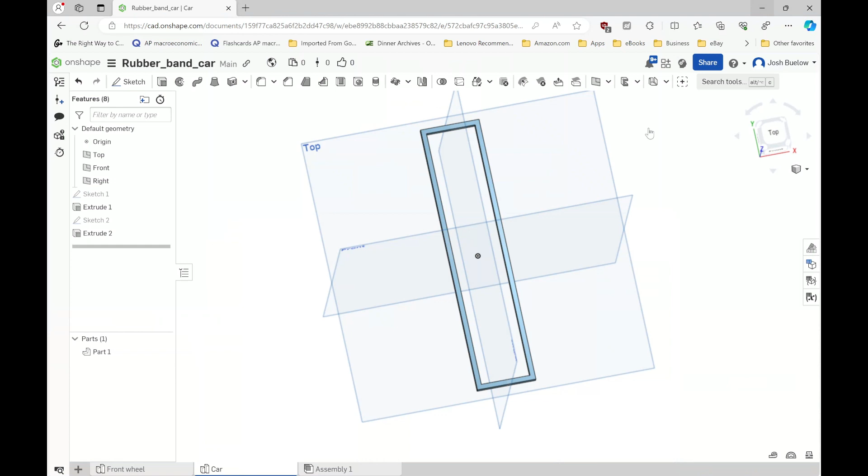Hello everyone. Today we're going to be learning how to design 3D printed rubber band car wheels, and even the whole rubber band car, so that you can change how the car is shaped for different challenges. So let's get started.

We'll click the blue create button, make a new document. I'm going to name this document rubber band car.

Let's start with the wheels, because if that's all you want to make, that's okay, so I can get you rubber band cars for our competition. Click the top plane, click sketch, and type N so we can look right at it.

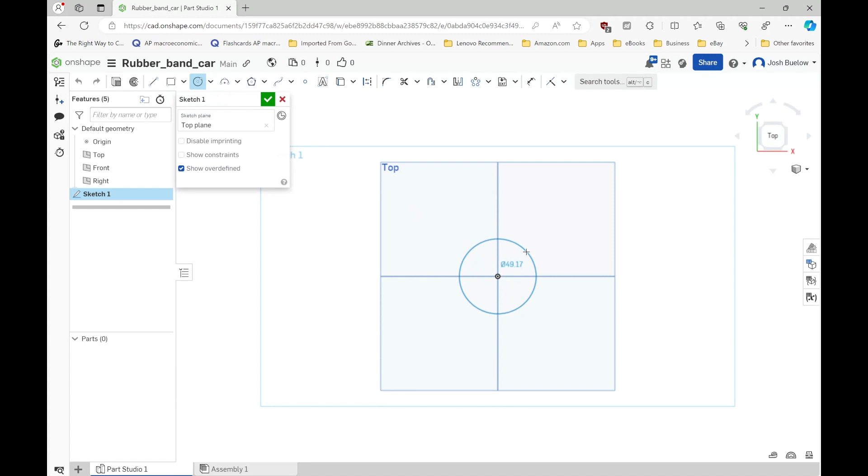If we want to make a wheel, all we really need are two circles. The first one goes in the middle and this is going to go on a kebab stick, so it should be 3.35 millimeters in diameter, that's what our kebab stick is going to poke through. Then I'm going to make another one also right from the center, and if this is a front wheel, maybe I'll want it 40 millimeters, something like that. Then that's about it.

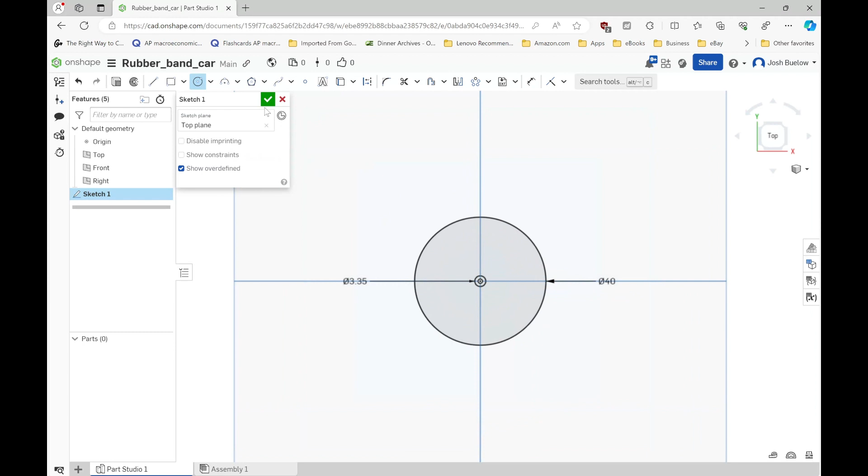Click the green check mark, click extrude, click the surface you want to extrude. If you orbit to the side, you can see this is more than we want, so let's make that just 3 millimeters for a front wheel, something like that. There we go, we have a rubber band car front wheel that will work.

But you can make wheels better or worse. This is a pretty basic wheel, but say we were running on carpet, maybe we want some better way for these wheels to grip so they don't slide at all. Let's see how we might do that.

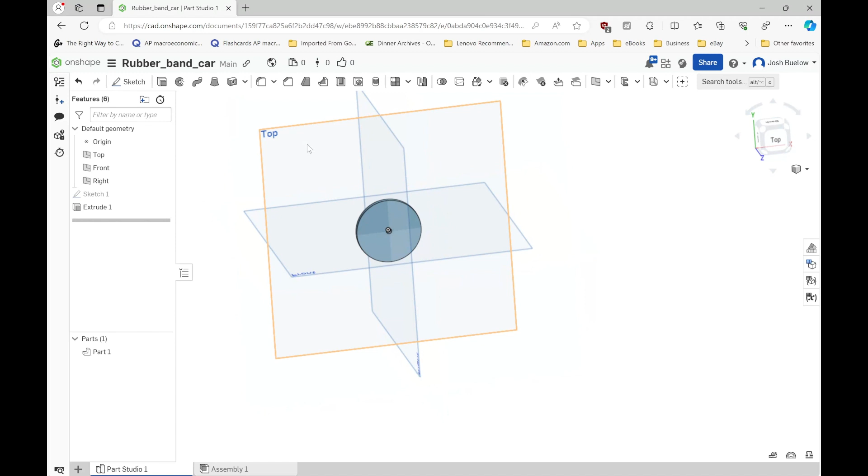If I click on the top plane again, and I make another sketch, and type N to look right at it, maybe I want to do something kind of like this.

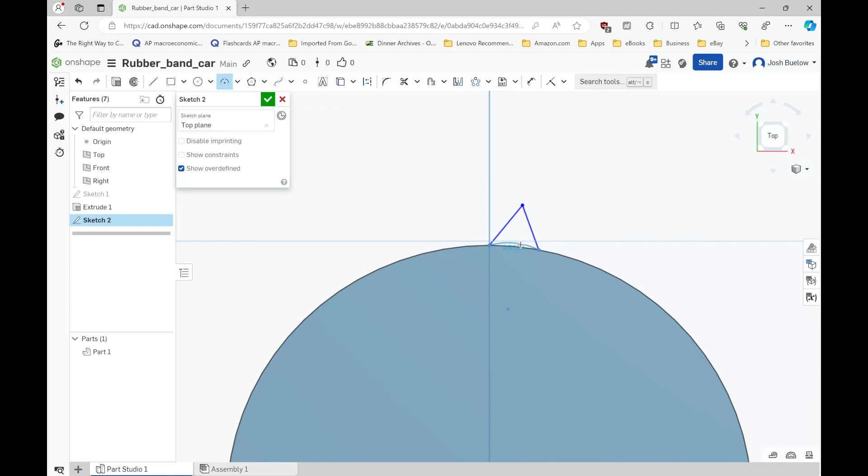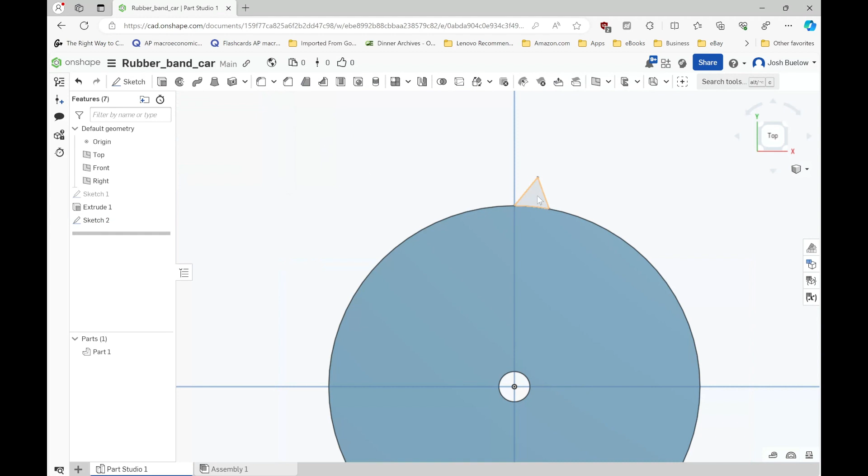Escape, and then let's make a 3-point arc that follows. It's not going to snap to it, is it? Well, I can do this, so that it follows our circle here. If I go coincident, I can click this point right here and that point, and that'll make it exactly what I'm after.

So I click the green check mark, click what I want to extrude, click extrude, and I'm going to extrude this the same distance that I did for the wheel, so let's go 3 millimeters. Then I'm going to pattern this around my wheel so I have spikes on my wheel that'll dig into the carpet.

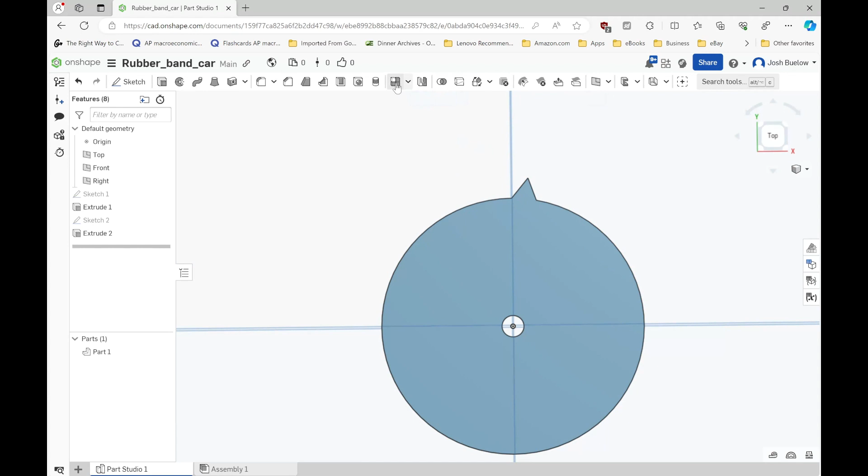Let's see, I want to do a circular pattern, and I don't want to do a part pattern, I want to do a feature pattern because I want to pattern that same extrude I just did. So I'm going to click extrude. My axis of pattern, I can just click around the surface like that, and then I'm going to click reapply features, and that'll work. You can change how many you want here.

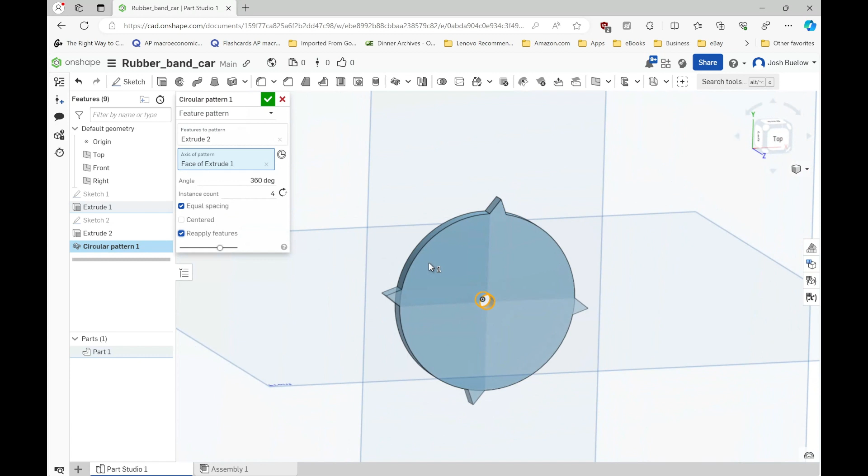Maybe I want 20, let's see what that looks like. Actually, looks pretty good. Let's see what 10 would look like. Yeah, something like that. So whatever you think, you can make these spikes bigger, smaller, make them blocks, whatever shape you think is going to dig into carpet best, maybe something that's kind of curved and comes back. Anyway, that's one way you can make wheels better.

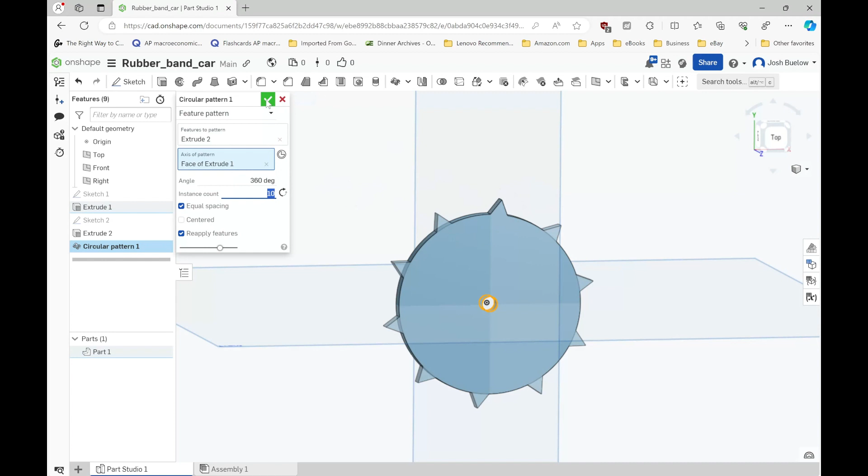You can make wheels better by making them bigger or smaller. A wheel that you want to go as fast as possible, you might want a little bit smaller because it'll take less to accelerate, and you won't have as big of a moment arm that the rubber band has to work against. But if you want it to go really far, maybe you want a bigger wheel, because a bigger wheel will get a lot more distance out per revolution of the rubber band.

And then the last thing is weight. The lighter you can make your wheels, probably the further you're going to go, because your car doesn't have to move as much weight to go from one place to another.

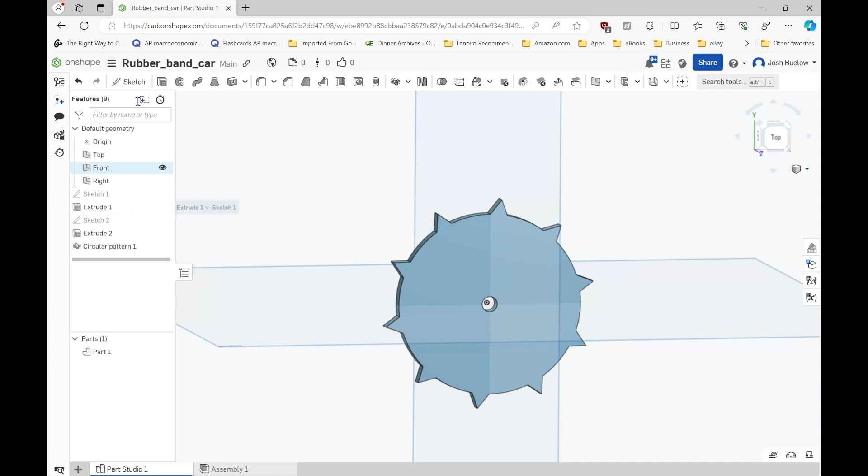So once again, if I click the surface I want to sketch on, make a sketch, type N to look right at it, you can add cutouts. These cutouts can be literally anything you want. Maybe you want circles that are cut out of your wheel. You can pattern these as well so it's nice and even.

If I press Control Z, I can get rid of them. Maybe you want squares that are cut out of your wheel instead.

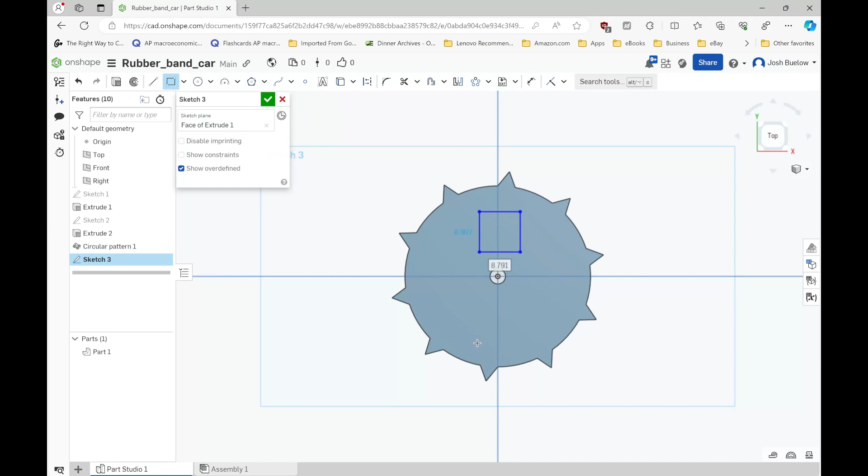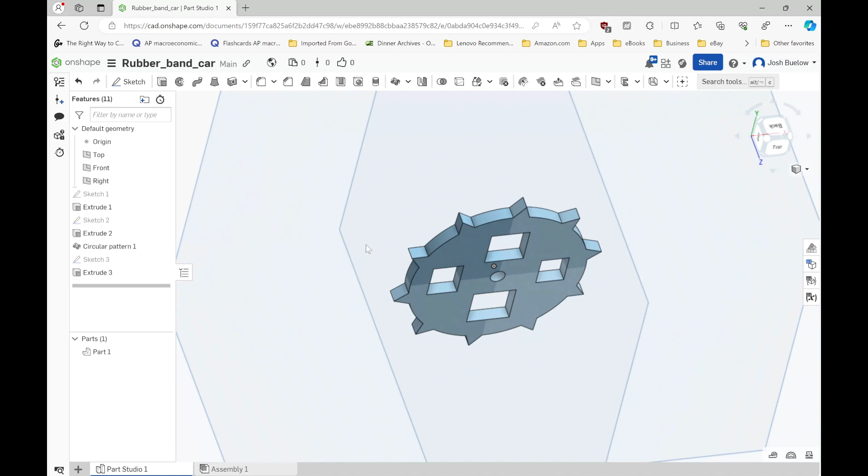Pretty much anything you want, but a lighter wheel will usually be a faster wheel. So again, I would just click extrude, remove, green check mark, and there we go. My wheel is a little bit lighter now, which means it can probably get up to speed a little bit faster.

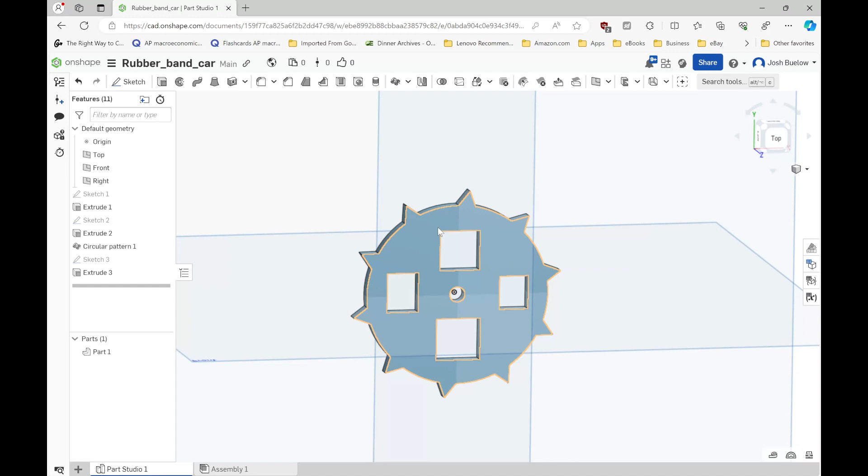So that's about all you really need to know to make a rubber band car wheel. Just get that 3.35 millimeter inner diameter, and then whatever outer diameter you want, however you want to make it grip to the surface you're going to be racing on, whether that's carpet, tile, or hardwood floor. Because plastic obviously won't grip as well as rubber, so you need to figure out a way to make it grip whatever surface you're on. But yeah, that's about it for the wheel.

If you also want to make the car, you can adjust the dimensions your car is going to be. So I'm going to show you how I'm going to dimension, or design, the car that you guys can use if you don't want to make one. And if you want to use this same tutorial to make a different car that's bigger or smaller, you can do that too.

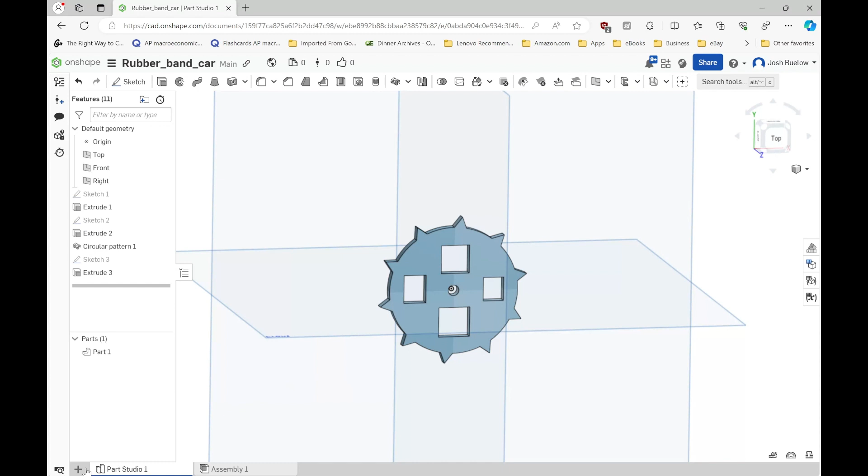I'm going to click this plus sign to insert a new part studio, create part studio. I'm going to right click and rename this car, because it's the actual part of the car. I'll rename this one wheel as well - I'll say front wheel, because you might want to make a different kind of shape for your rear wheel, since that's where we're actually going to have all the force from the rubber band going through.

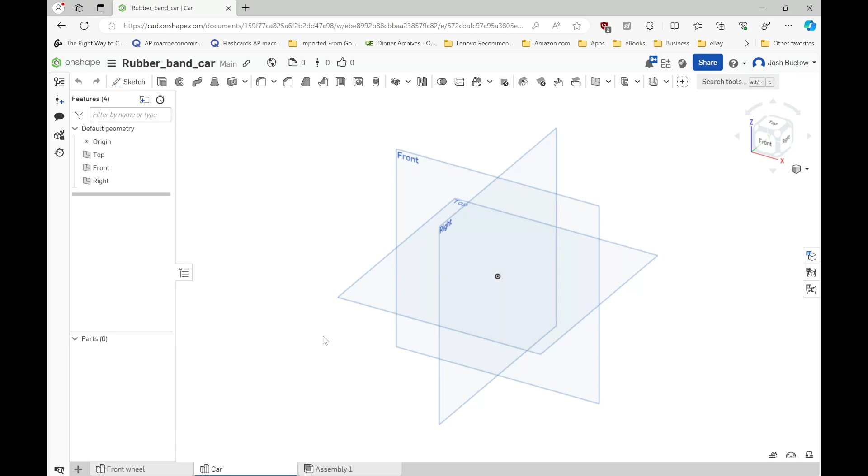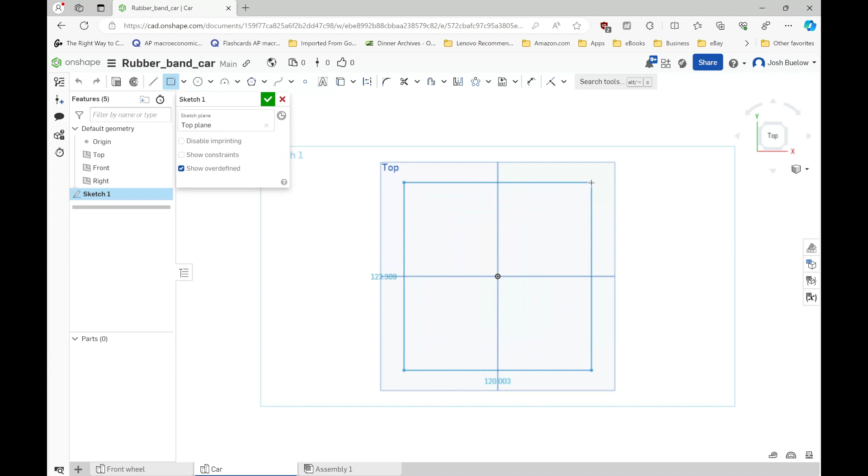So to make this car, I'm going to click my top plane, click sketch, and type N so I look right at it. I'm not going to use the regular rectangle - I'm going to use the arrow to the right of it and click center point rectangle. Click this middle point, make sure it has that orange box around it, and then click anywhere you want. I'm going to click here, and I want it to be just 30 millimeters wide and 140 millimeters long. So I'm going to click the green check mark.

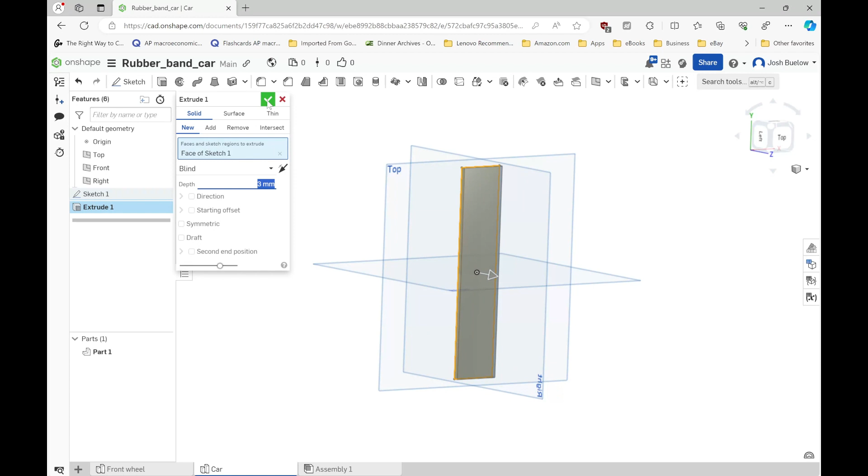I'm going to click that surface and extrude it. I don't want 25 millimeters, I only want 3 - this is going to be pretty skinny. But again, the lighter the car is, the faster the car is probably going to be. So there we go.

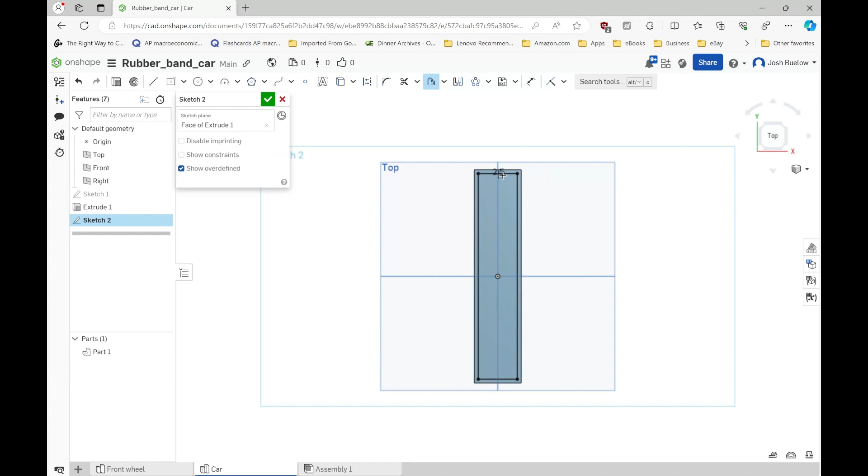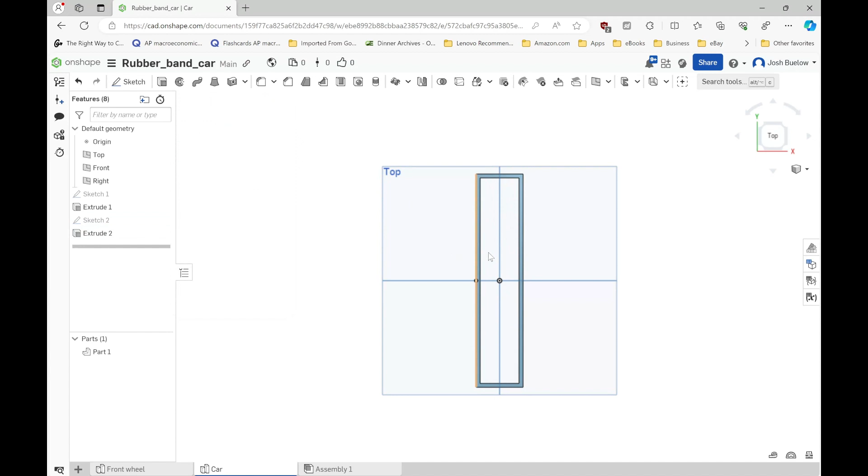Then I'm going to click that same surface, make another sketch, and cut the inside of it out. How I'm going to do this is use the offset tool, click all of the different edges, and then drag them to the inside. Now, I just know because I've designed this before - press enter - that you want this to be 2.5 millimeters, because that will still be strong enough to resist the tension of the rubber band, but it'll be nice and light. So I'm going to click the green check mark, and then extrude cut the inside of this out. Click extrude, remove, green check mark, and it'll cut that right out.

So next, I want to add my wheel hubs to this. I'm going to rotate to the side, click the surface I want to sketch on, click sketch, type N so I'm looking right at it, and use this 3-point arc tool. Click anywhere on this line, click, and drag this so that the dot you can see is directly on the top line - I know it's there when I get these orange squares, meaning it's directly on that line. So I'm going to click, and I want R10, meaning a radius of 10, so I have a diameter of 20 on this circle right here.

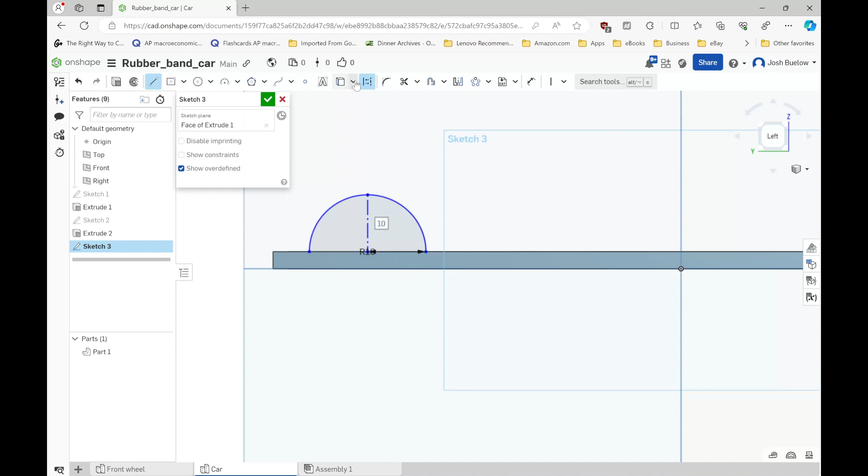Next, I need to add the hole for my wheel axle. So I'm going to make another circle. Actually what I should do first is make a construction line. Grab the very center of this, so you can see when I get this orange square, I'm at the very center. Grab the center, straight down. Click construction again, so you're not making a construction circle, to make sure my circle is definitely in the center. Click anywhere that isn't highlighted, that doesn't give you a highlighted orange square.

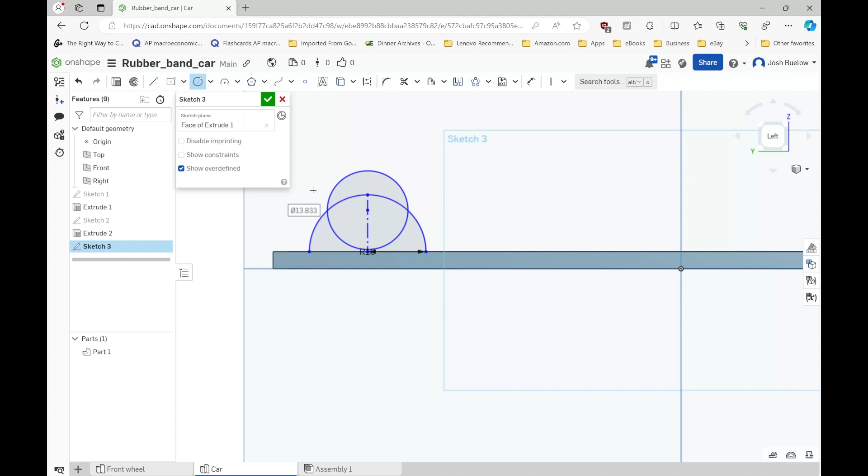So I'm going to go here, drag out, and I'm going to say we use a straw for the bushing here. So I know that this is exactly supposed to be 6.1, so I'll say 6.1. And then the height here needs to be 3.1 millimeters. There we go. And then I'm going to draw a line across the bottom to complete my sketch here.

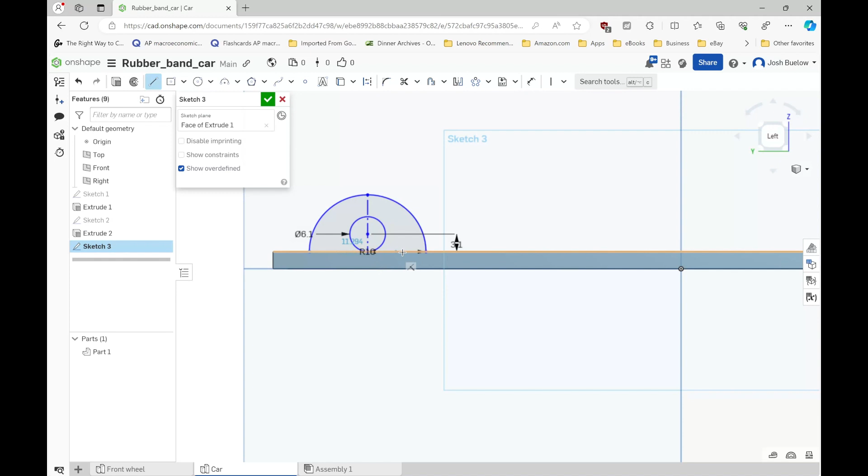And then I'm going to mirror this across the center line because we made our car symmetrical from front to rear, which makes this a lot easier. So I'm going to click mirror, select the line I want to mirror across, and then click all the parts that I want to mirror.

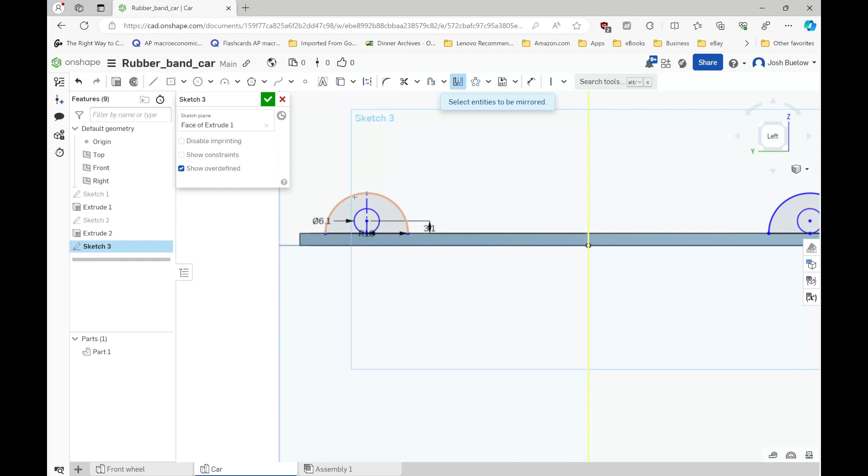Then the last thing I'm going to do is dimension where this is with respect to the front of the car. So I'm going to click here, click this side line, and type in 5 millimeters. That'll also make this 5 millimeters away from the back. So click the green check mark, and I'm going to extrude both of these 2.5 millimeters.

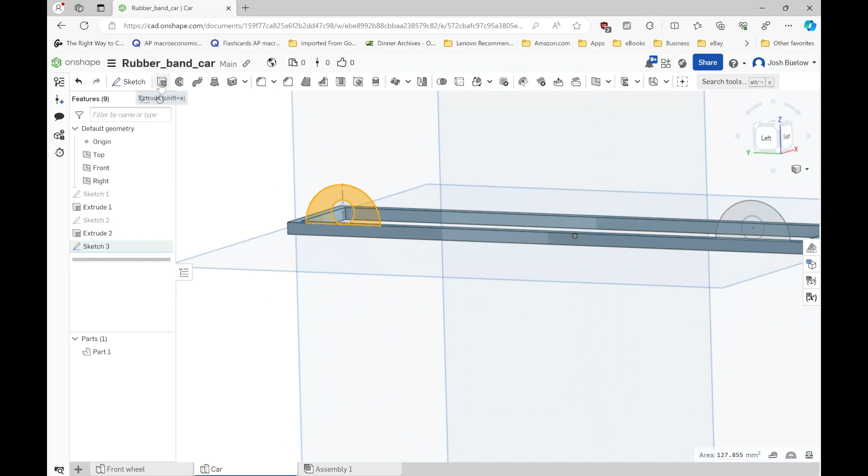So there and there. Oh, not the line. There we go. And extrude, I want the opposite direction, 2.5 millimeters. And see, there we go, perfect.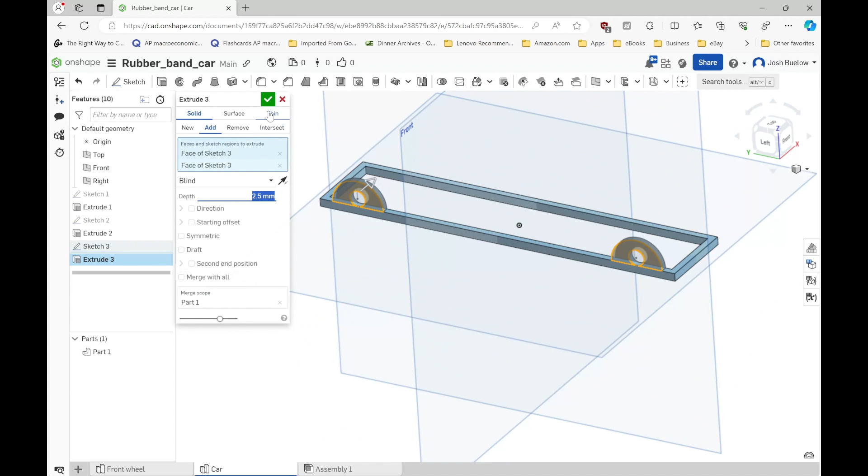Switch to add. It used to be saying new. We want to just add to our chassis instead of making a new part. Green check mark. And then I don't have to draw these all over again to make them. I can just mirror them across this right plane right here because you see it goes right down the middle, so I'm going to do that to save me some time.

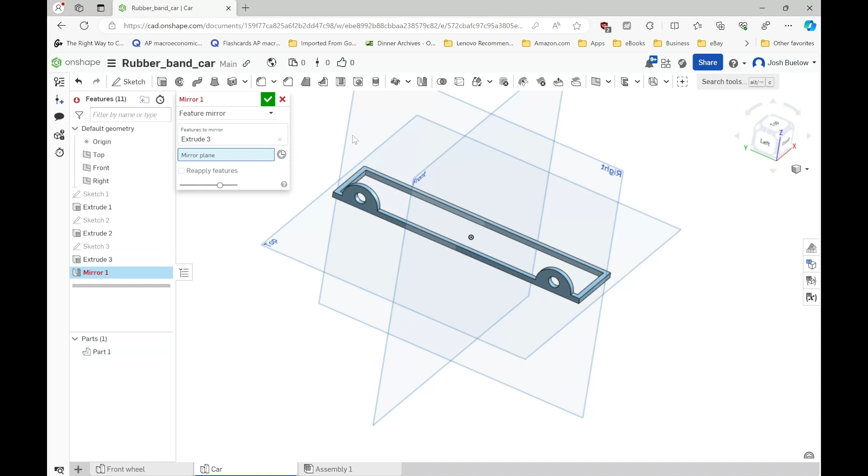So I'm going to use mirror right here. Entities to mirror, it's not going to be a part, it's going to be a feature, that extrusion that we made. So I'm going to click extrude 3 because that's what I want. My mirror plane is going to be the right plane, and I have to click reapply features, otherwise it's going to give me an error. Click the green check mark.

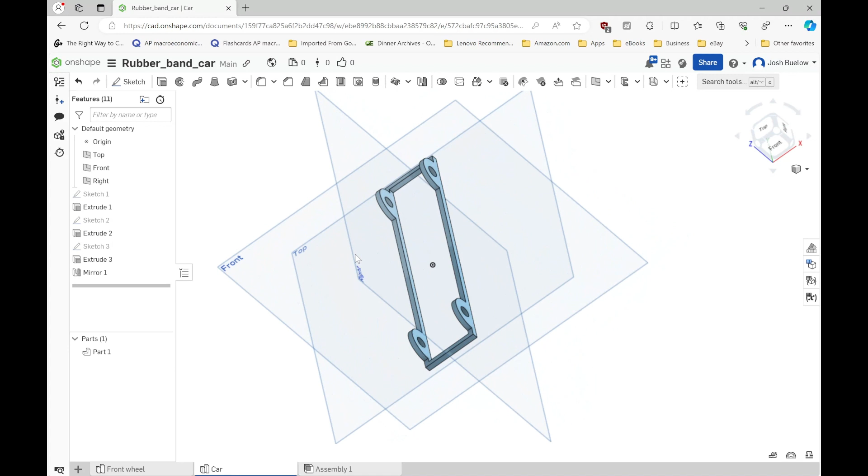All right, so the last thing we have to do is have somewhere on here that the rubber band can actually attach to when it's going to wrap around our axle in the rear of the car. So let's make that next. I'm going to click my top plane, type N, and click sketch, so I can make a new sketch.

And for this, for the base of this, I'm only going to need 2 rectangles. So I'm going to click corner rectangle and click one of these sides, make sure it's highlighted orange, make sure the other side is highlighted orange. That's just going to be 25 millimeters, so I'm going to change this one to 5 millimeters.

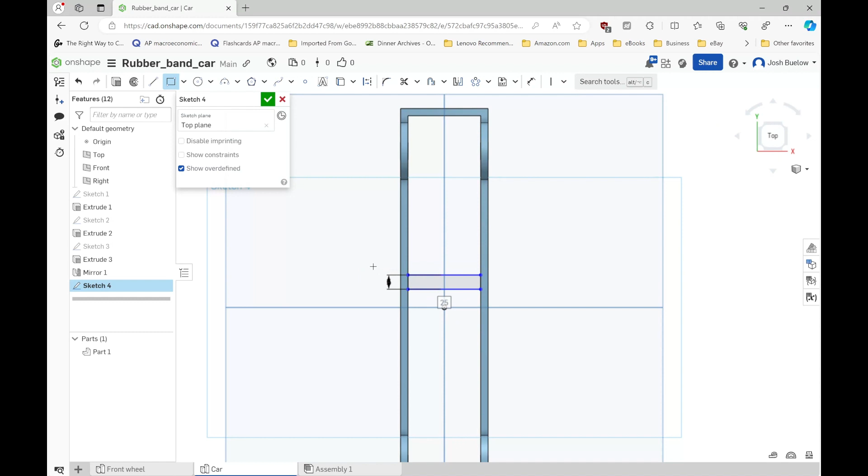And I'm going to dimension this so that the bottom here is, let's see what 20 looks like. 20, no, let's see what 10 looks like. 10 millimeters beyond midpoint of the car. I like that. Green check mark.

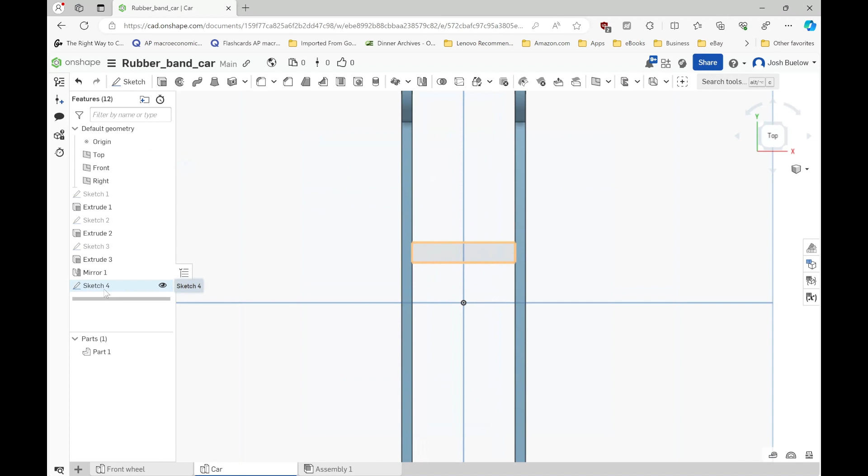Oh, sorry, go back into that sketch. We actually need to add one more rectangle, like I was saying. In order to do that, let's make a construction line. Get this orange square, go all the way across, and then I'm going to use this construction line to make sure that my next rectangle, which is going to be a center point rectangle, is exactly in the very center of everything.

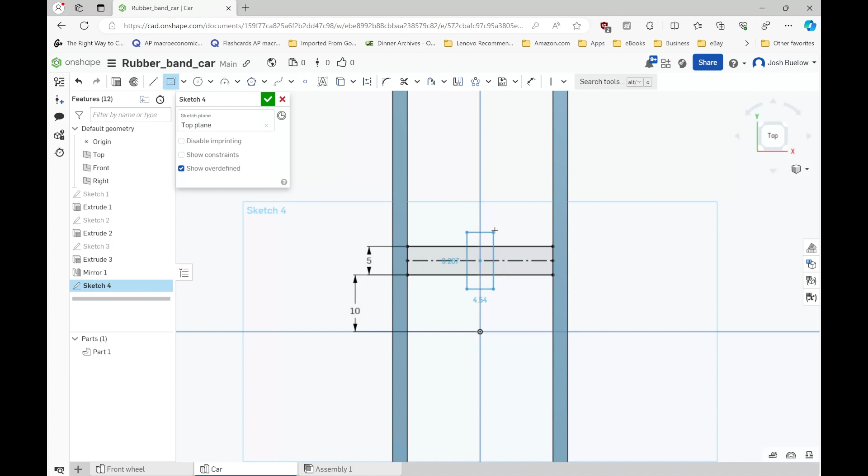So there we go. I want this to be 5 millimeters again. I want this to be 30 millimeters this time. There we go. Green check mark. And let's extrude things.

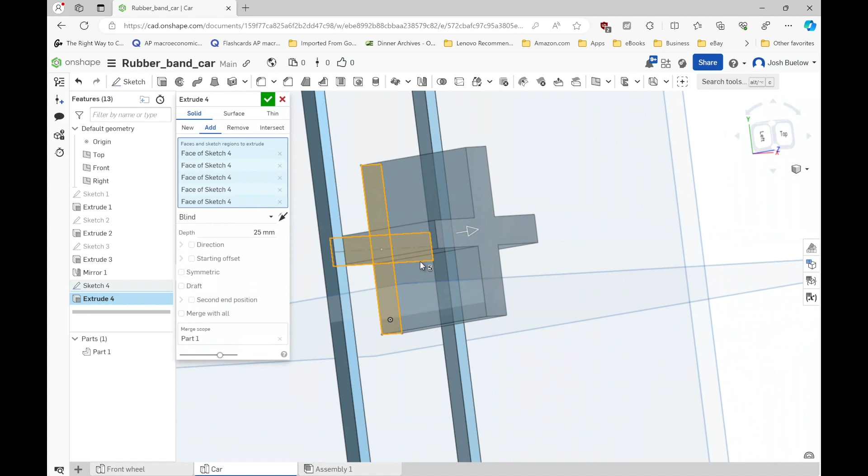There we go. We could have made that one extrusion by cutting out these lines that make a box right there, but no need. And I want this to also be 3 millimeters, just like the rest of my car. Click the green check mark to add it.

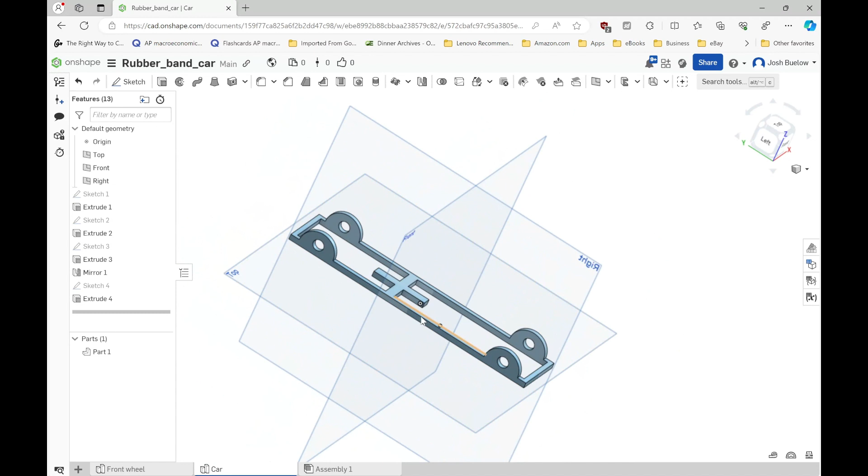Now we're going to use a different feature that OnShape has so we can make our next sketch a lot easier. We're going to try to add the hooks that will hold onto rubber bands right here. Normally I would click here, type N, and try to make a sketch, and I want to get this front edge right here, but from the side I can't see where that is. It's really difficult. So I'm going to X out of the sketch and show you what's going to make that a lot easier.

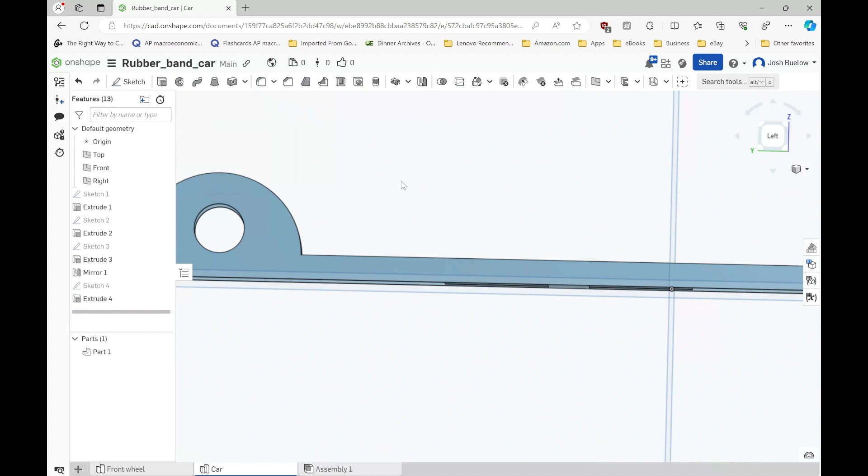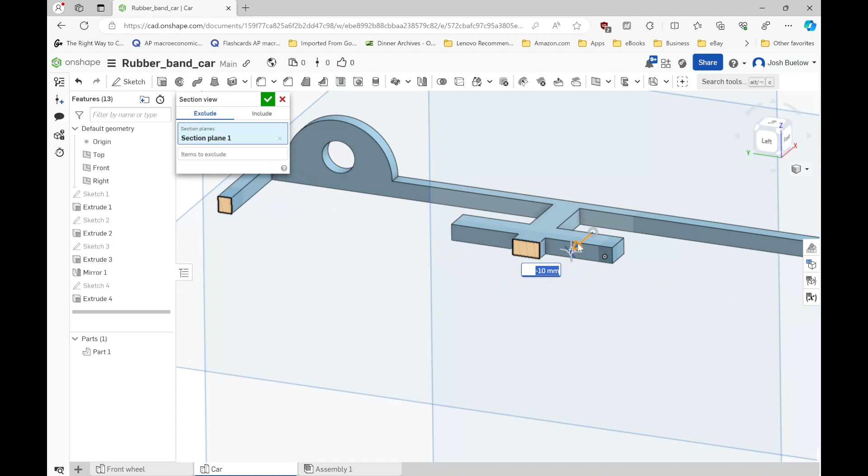If I click Shift X, then I can make what's called a section view. I can basically cut all of this along a line temporarily just so I can see what I'm trying to sketch here. So I'm going to click this right here and drag it to where I can see. So there, I can see everything I'm trying to sketch. I'm going to click the green check mark, and there we go.

What we just cut away isn't gone. It wasn't an extrusion. We can get rid of it again by pressing Shift X, but this is just so we can see what we're going to be designing here. So I'm going to click this face, click Sketch, and type N.

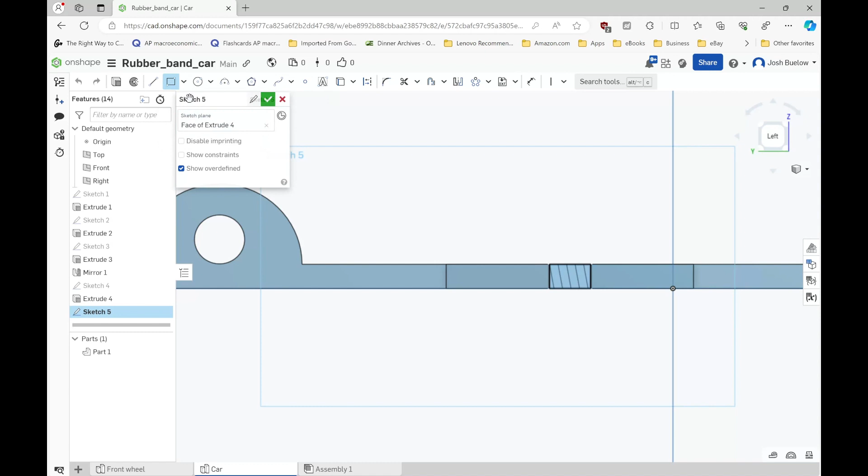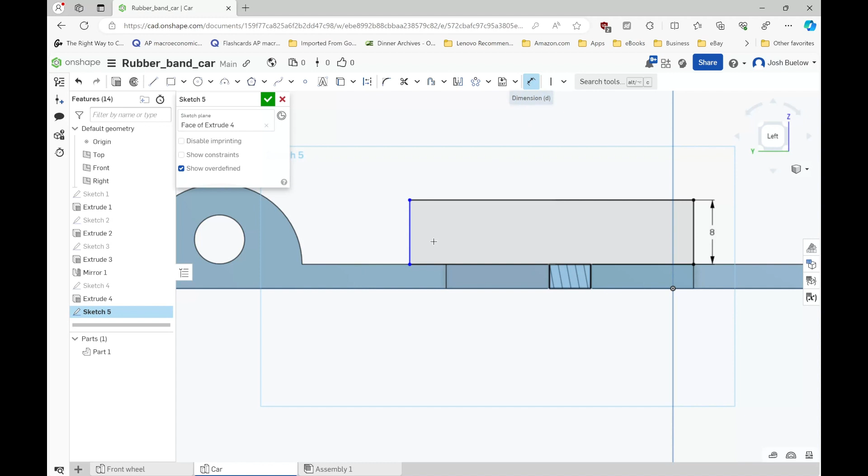For this one, let's make a corner rectangle, not a center rectangle. Here we go, and grab this point right here and drag it over like that. Now I want this to be 8 millimeters tall, and I want this, well, that's going to change based on what I'm going to do next. So escape, I'll type D to get my dimension tool up, and I want this to be 4 millimeters. How about that?

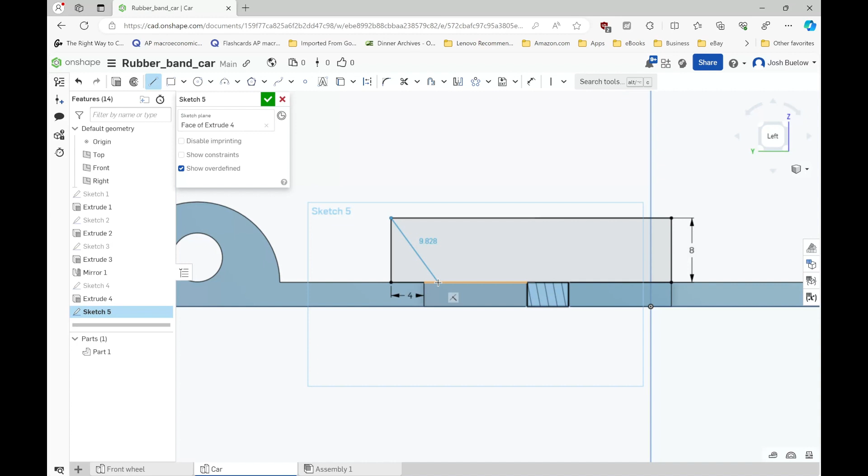And then the next part is going to be kind of cool for how we figure out how to make hooks out of a box like this. So I'm going to click this corner right here, click this edge, and then type D and make this 45 degrees. Like that. Now I can pattern this and we'll see what happens next.

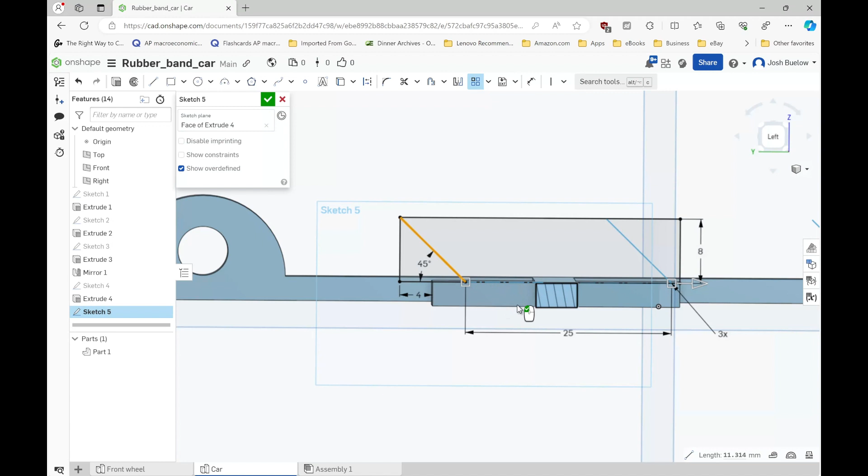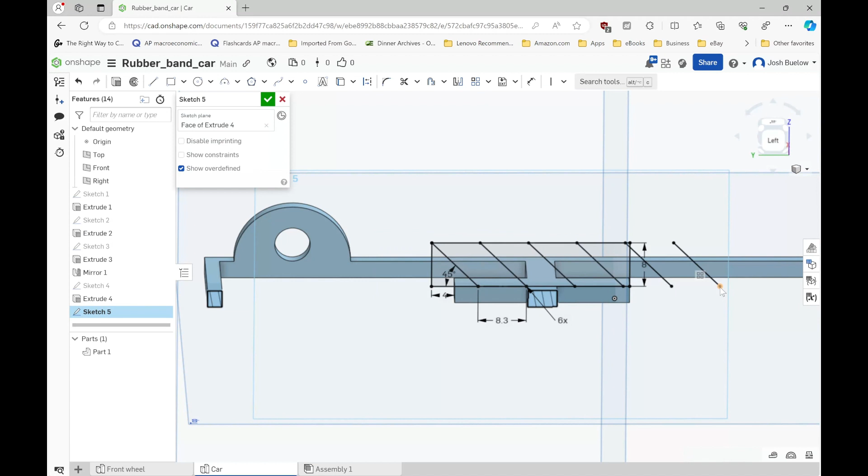If I click my linear pattern button right here, and I click what I want to pattern, and I click a direction, which is just any edge that's going the way I want it to go, then I can choose which direction it goes. It already is going the way I want, so I can just drag this arrow to change where these are. Now I don't want 3 for this, I want 6. And I want to make sure that this point right here at the end is coincident with that right there, and you'll see why.

So I'm going to click coincident right here, click that point, click that point. Oh, and it threw an error. I'm going to press Control Z, and let's see what the problem was. I bet it's this. If I get rid of that, let's see what happens next. So I'm going to try coincident again, click here, click there, and there we go. Everything snapped into place.

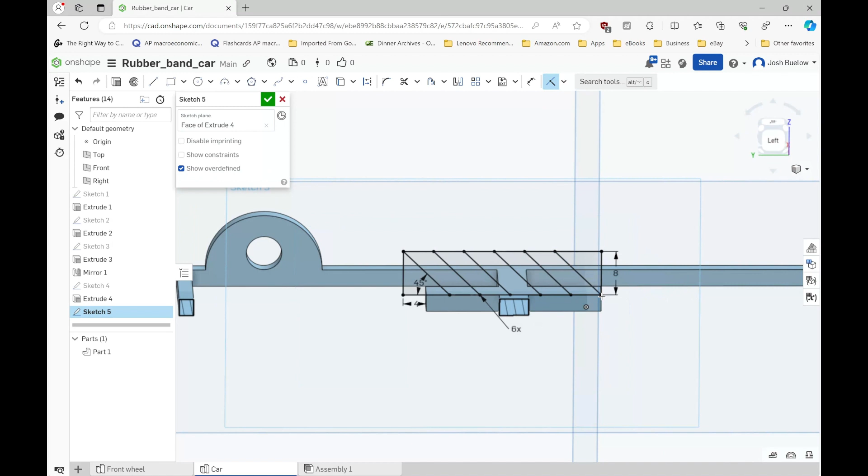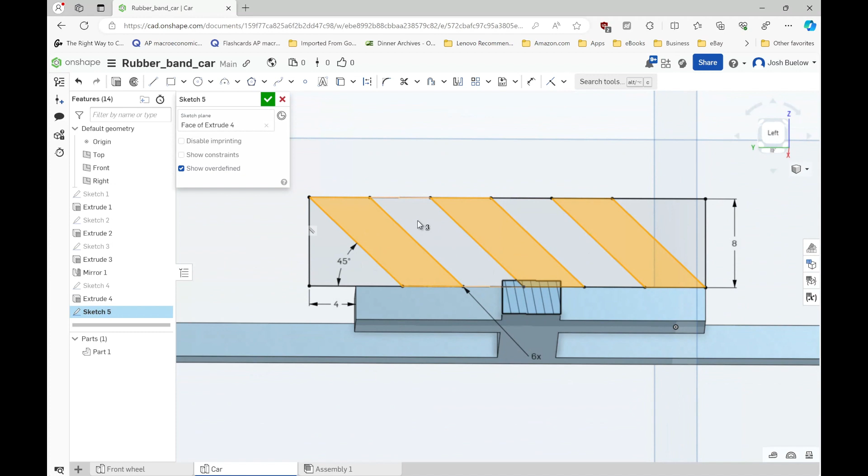So let's see if I can illustrate what I'm getting at here. This is a hook that I want. This is a hook that I want. Let's get rid of that. And this is a hook that I want. So if I cut out where all the black lines are, I'll be left with those hooks.

So I'm going to press spacebar to unselect all that. And I'm going to click the scissors, the trim tool, and get rid of these 2 lines, and get rid of these 2 lines, and get rid of these 2 lines, and get rid of these 2 lines. And there we go, we have 3 hooks.

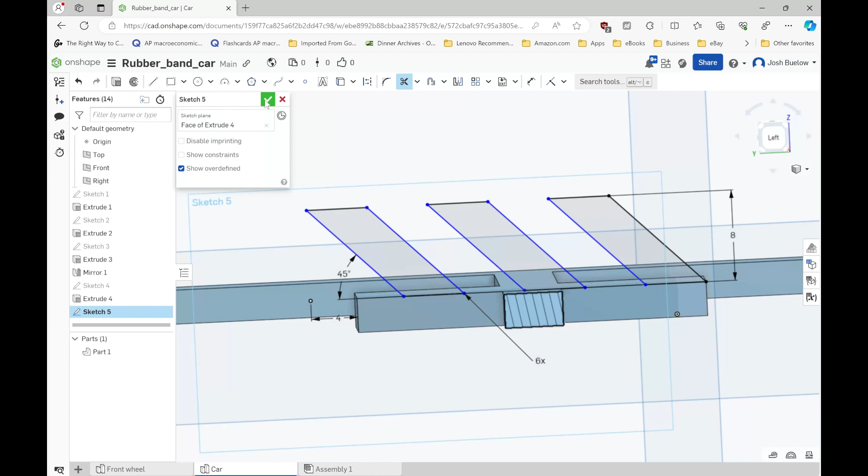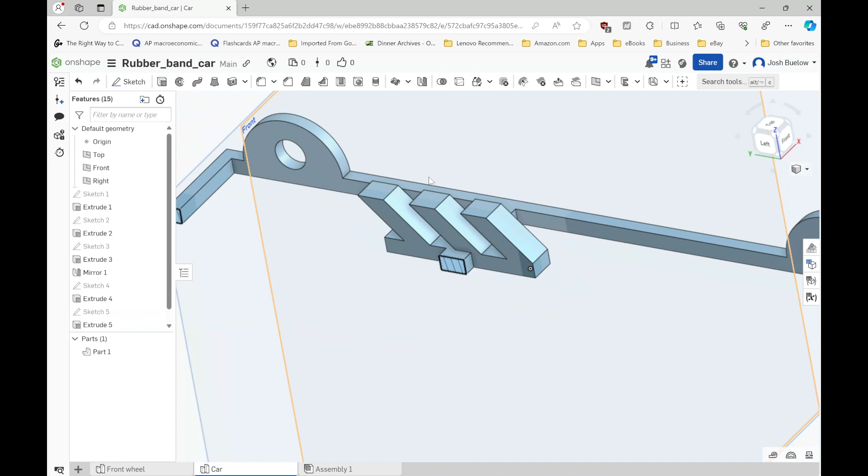I'm going to click the green check mark, and we're going to extrude these 5 millimeters that way. So I'm going to click extrude, click the sketch that I want, and say go the other direction because I don't want it that direction. There we go, 5 millimeters, and there we go. We have 3 hooks. So click the green check mark.

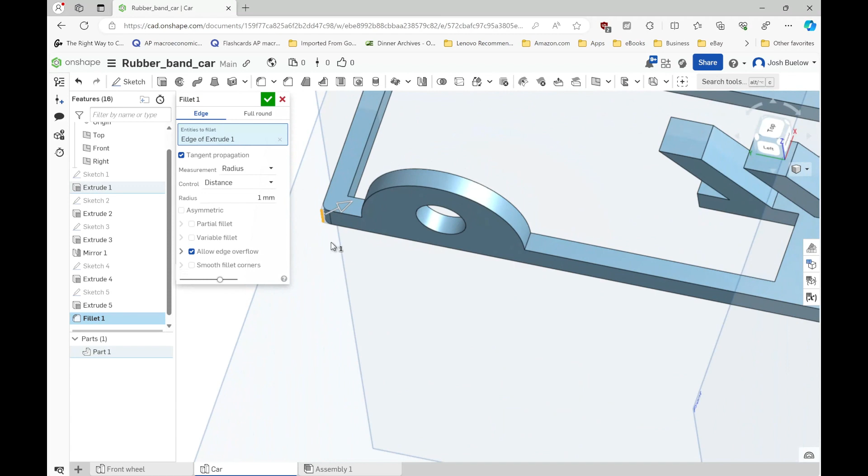Now to get rid of this cut that I temporarily put in there, I'm going to click Shift X again, and everything's back. Cool. So this will work as a car as you have it, but we can make everything a little bit smoother with the fillet tool. So the first thing I'm going to do is click these outside edges of my chassis, and I want to get all of them.

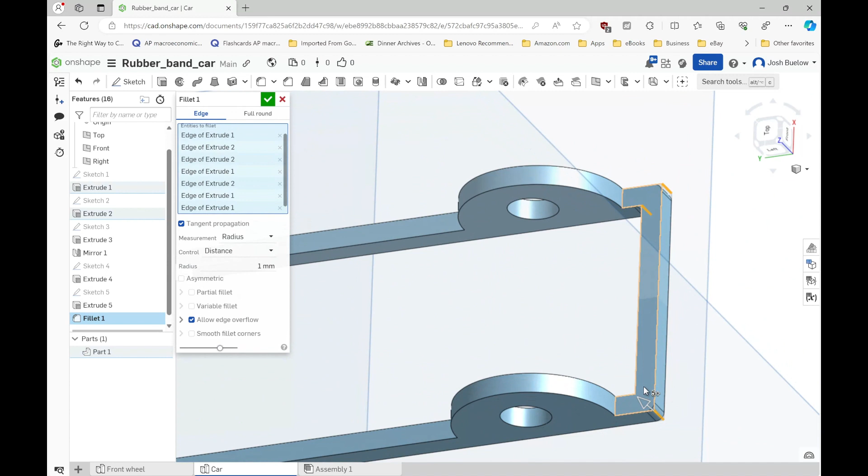All these corners, so I guess not all the edges, but all the corners inside and out. There we go, last one. I want this to be a 5 millimeter radius. There we go, so a little bit smoother. Green check mark, let's make another fillet.

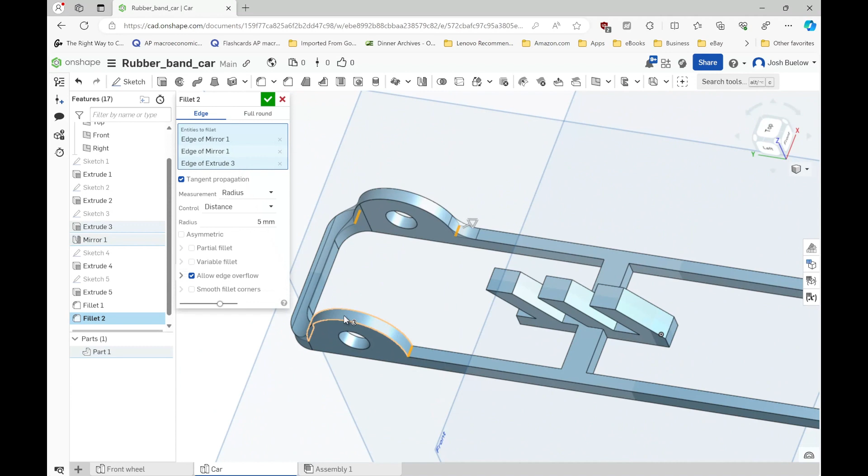The next fillet I want is on these edges right here. It's also going to be a 5 millimeter fillet. Let's click there, and there, and there. I'm actually seeing I missed some edges or some corners that I should have gotten, so I'm going to get them now. Click and click.

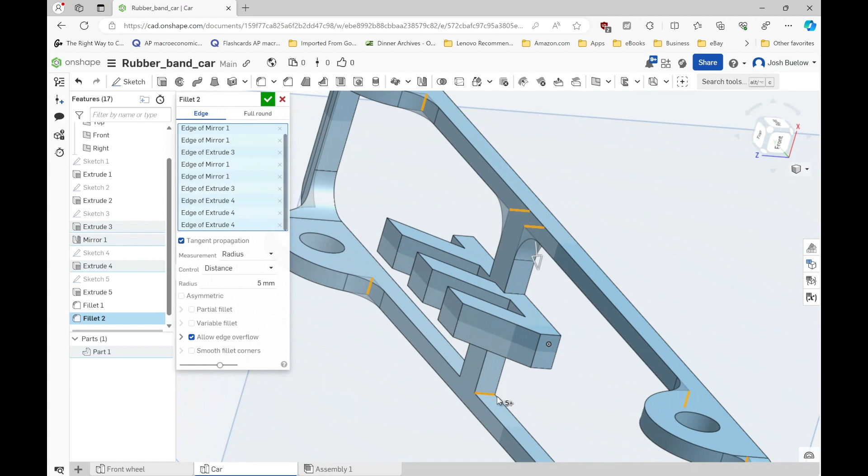Let's let it load, let it catch up. There we go. And there, and there. So many. But it makes it a lot stronger if we do this. There we go, I'm going to click the green check mark.

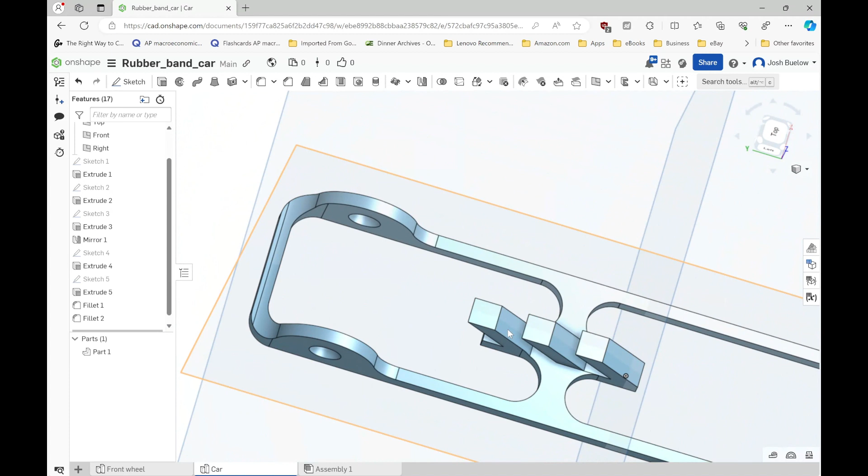And there we have that. And then I'm going to just smooth these out a little bit too with the fillet tool. We don't want any sharp edges cutting any rubber bands. So if I click faces, then it will fillet everything around it. I can't do a 5mm fillet because of how small these are, but I can do a 1mm fillet.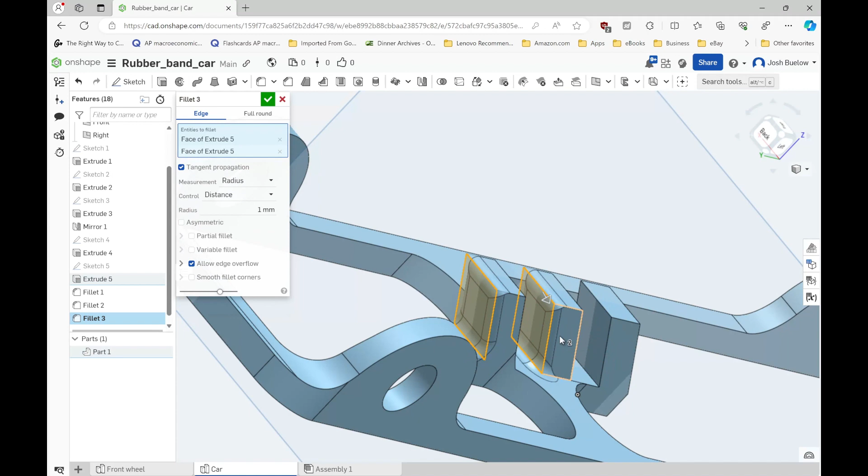There we go, and click that edge and click that edge. But this highlights pink, which means that's not going to work. So I got to unselect that edge. And let's see what else I can get just from this fillet here. Looks like OnShape's being a little bit slow. Got to let it catch up with everything we're doing.

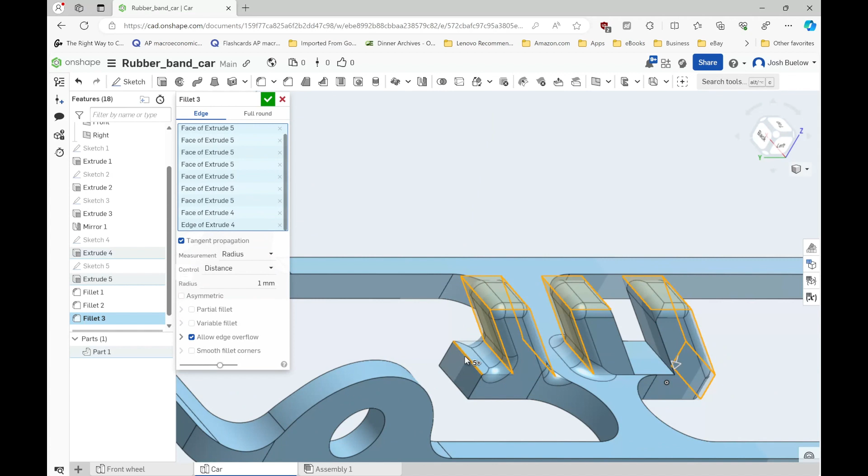Fillets can sometimes be a little too computationally intense for OnShape to get quickly. Guess it doesn't want me to do any of that right now. There we go, green check mark.

We are almost there. I'm going to make another fillet like I just clicked. That's going to be more. Doesn't want me to get that corner. I can get this corner though. More of these edges.

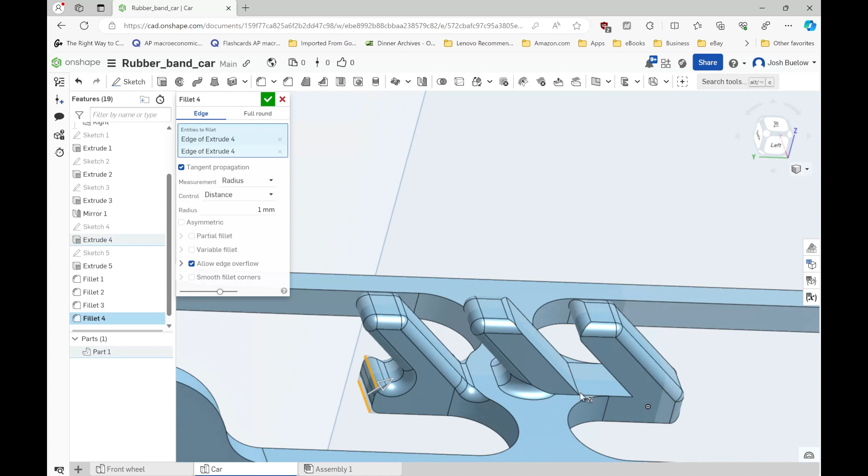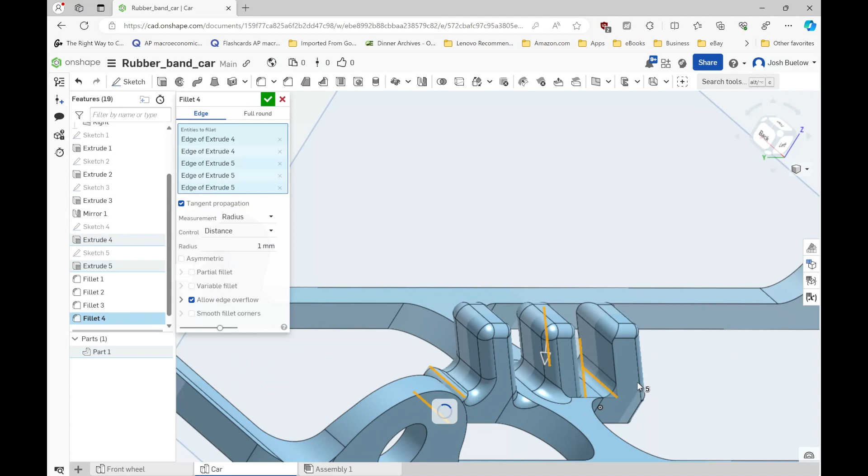Looks like it was not happy with that line, but we can get these ones. Can't get that one. So I'm going to click it again so I get rid of it. All right, let's try that. Sometimes you have to split up your fillets so that it will actually get them all.

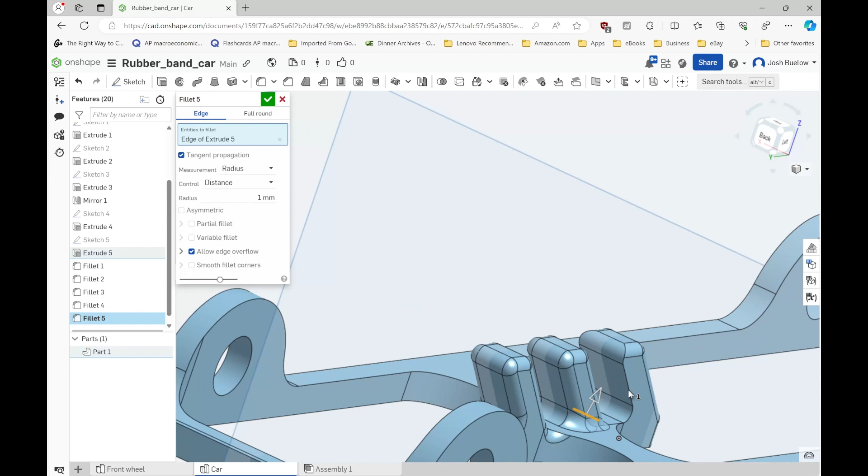Let's see if that works for this. Yep, there we go. And then maybe this. Nope, still doesn't want to do it. That's okay, doesn't have to be filleted. There we go, and there's your car.

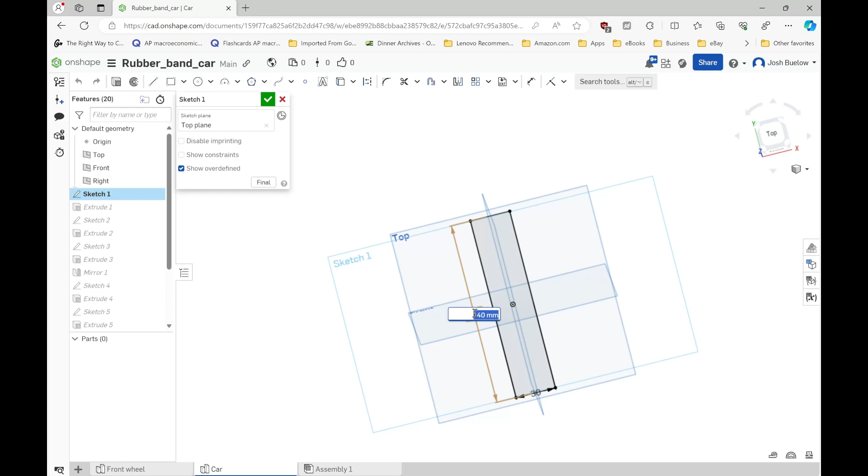Now the really cool thing about this is that based on the way we designed it, you can now change just this one sketch to change all of the dimensions of your car. So right now, if I double click into it, we can see that the base of our car is 140mm long by 30mm wide. What if I wanted a really long car? What if I wanted a 300mm long car? Click the green check mark and everything updates.

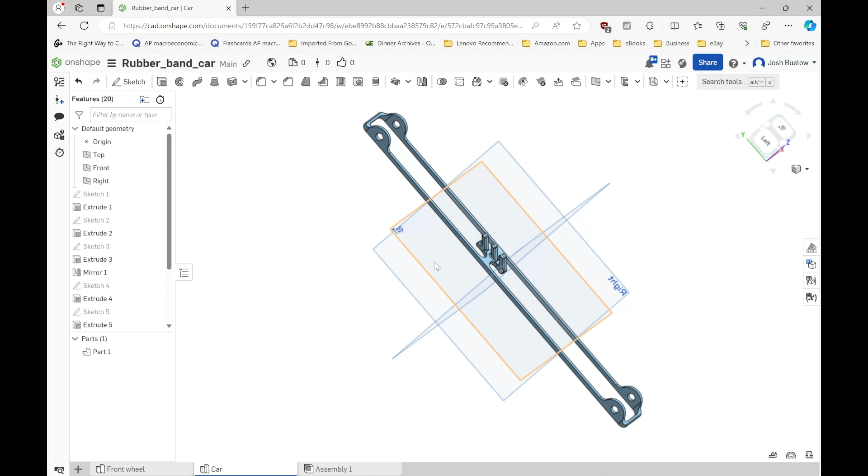We still have our wheel hubs on the ends and we still have our rubber band hooks in the middle, and we might want to adjust this back a little bit so that our rubber band isn't super stretched out right from the start, but that'll work. So maybe if you think that a longer chassis would be better for, I don't know, speedy takeoff so you don't pop a wheelie, something like that, you could try this.

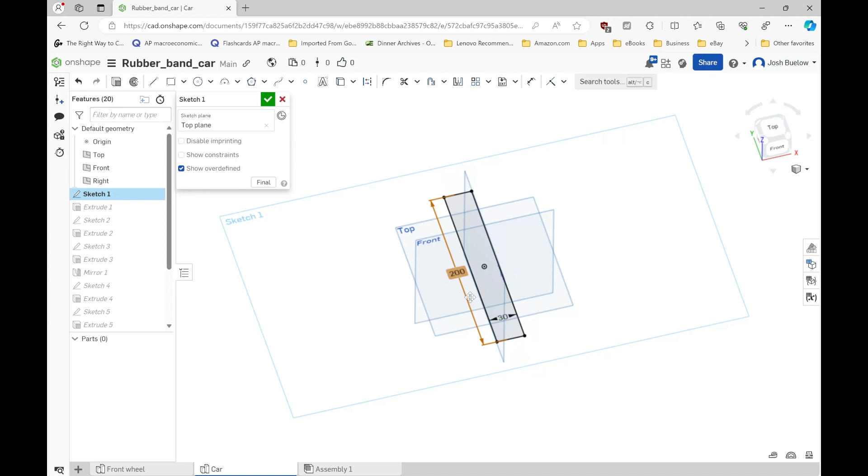Or if you want to make it wider, we could do the same thing. So if I bring this back to maybe, let's say, 200mm, and then made this also 200mm, we get a box of a car. There we go, now it's wide. Now, if you were to do this, you might want to add a little bit more reinforcement afterwards because this is going to be pretty flimsy when it's this big with such skinny pieces. But the point is, you can do that if you want to.

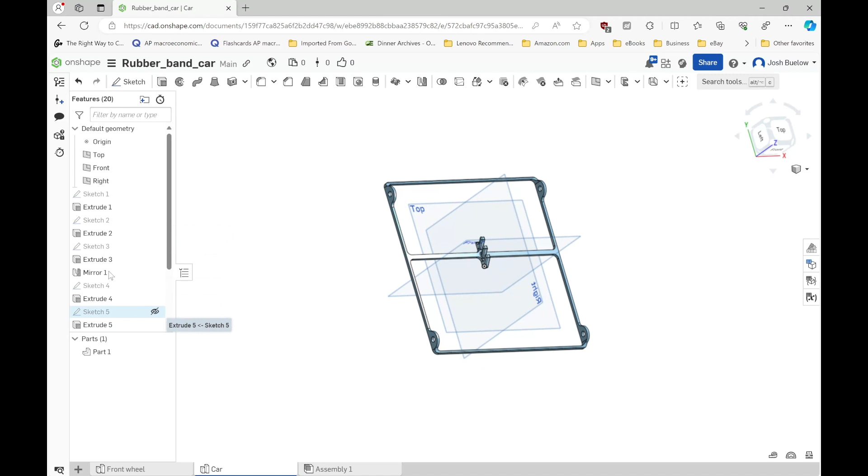So, if you made it this far, I'd recommend adjusting the car a little bit because everyone else will be racing with 140mm by 30mm. And you might be able to get your car a little bit faster or run a little bit longer if you change the body to be longer, shorter, wider, anything like that.